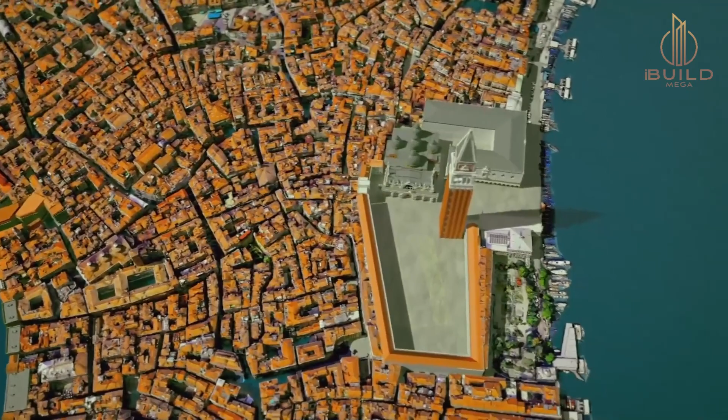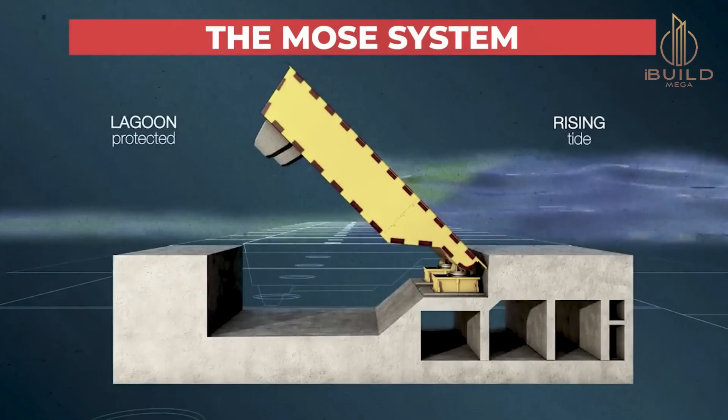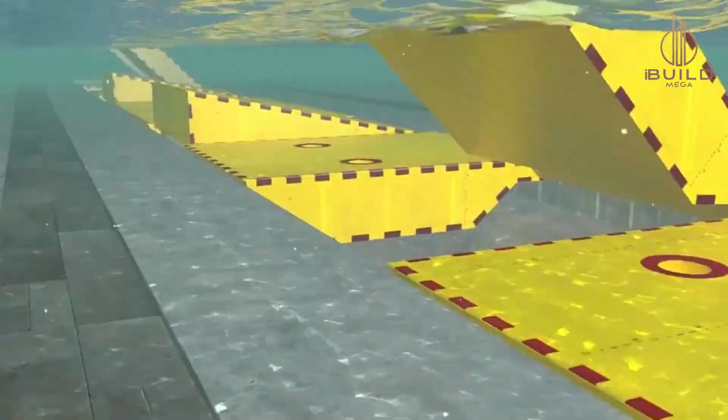In the face of adversity, the city is poised to make history once again, on this occasion via an audacious megaproject. Introducing the MoSE, a visionary defense system forged with a hefty $7 billion investment. This monumental project merges cutting-edge technology with centuries-old craftsmanship, a testament to Venetian ingenuity. The historic arsenal, once the heartbeat of Venice's maritime power, now pulsates with renewed vigor. Here, skilled hands and state-of-the-art machinery fashion colossal barriers, each piece meticulously designed to withstand the relentless Adriatic waves.

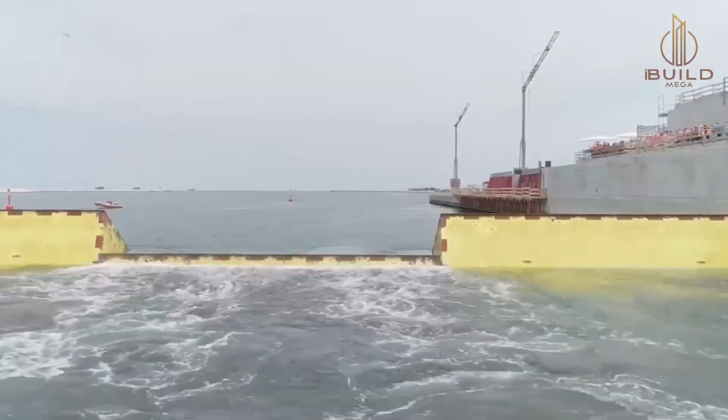However, this project is not without its controversy. It has been decades in the making, has required considerably more funding than originally forecasted, and been marred by corruption and environmental protestations, with aspersions also cast over its long-term sustainability. So what is the MoSE? How is it going to help Venice adapt to an ever-changing climate, and can other similarly threatened coastal cities learn anything from its implementation?

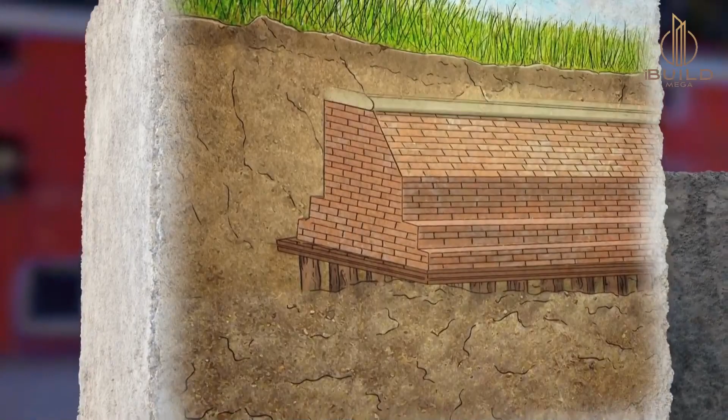Beyond the inconvenience and economic strain caused by the flooding, the city's remarkable architectural and artistic heritage is also under grave threat. Historic structures adorned with priceless artworks suffer from saltwater erosion, and foundations of ancient buildings are gradually weakened, putting their long-term survival in jeopardy. Preservationists work tirelessly to restore these treasures, but without a comprehensive solution, Venice's rich cultural legacy remains in peril.

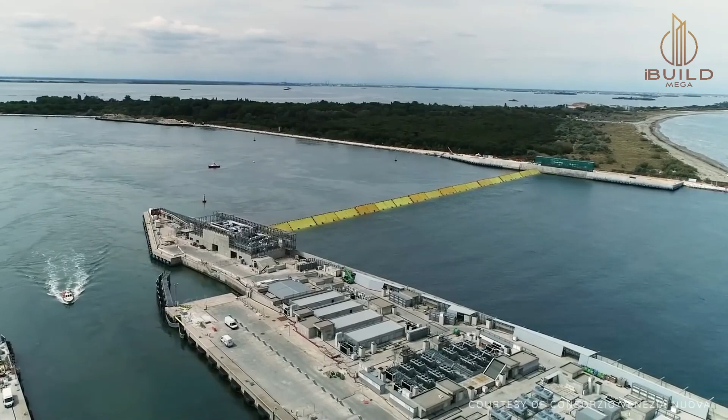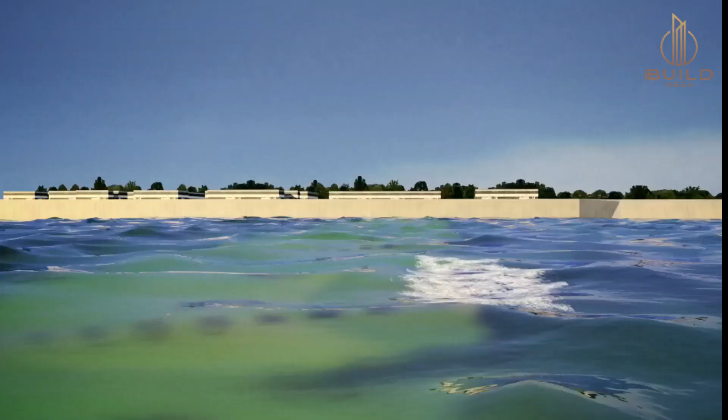This is where MoSE comes in, Italian for Moses and short for Modulo Sperimentale Elettromeccanico, or Experimental Electromechanical Module, a $7 billion flood blockade system finally up and running 18 years after construction began. The system consists of 78 gates, each 20 to 30 meters long and 20 meters wide, which rise up from the water when there's a threat of flooding.

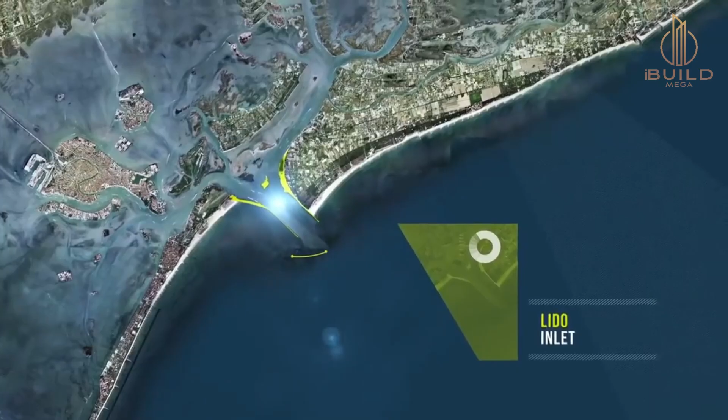These gates are distributed in 4 lines at the 3 entry points to the Venetian lagoon from the Adriatic Sea. The 2 southern inlets, Malamocco and Chioggia, have 1 barrier each, but further north in Lido lies the Treporti Inlet, the widest channel by far, with a seabed that varies in depth from 6 meters to 12 meters. Rather than building a massive barrier of varying height, an artificial island has been constructed to divide the inlet in half so that 2 smaller barriers could be built.

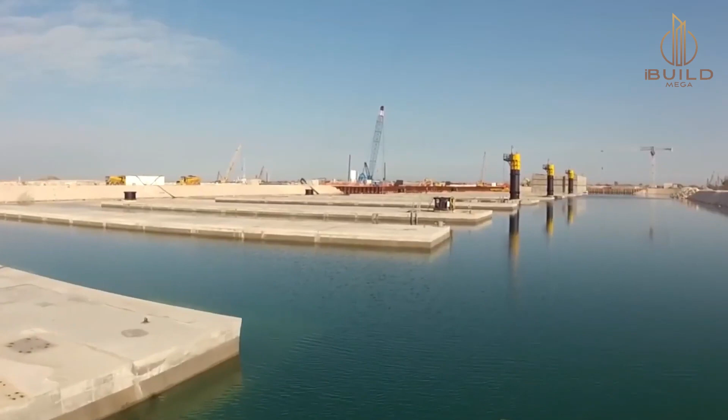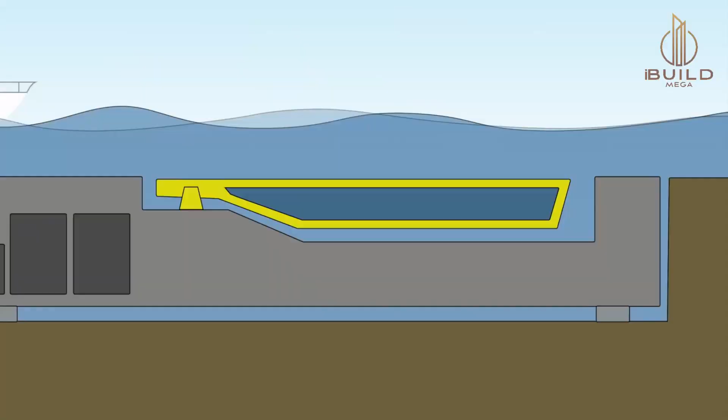And yet, when the barriers are not in use, you don't see a thing. Unlike flood barriers in Northern Europe at a much greater expense, the MoSE was designed to be invisible when the barriers are not needed. The gates are filled with water, submerged, and sit in massive reinforced concrete housing, allowing boats to sail by unimpeded. To raise the barriers, compressed air is pushed into the gates, forcing the water out, causing them to turn on their enormous 42-ton hinges and emerge from the lagoon.

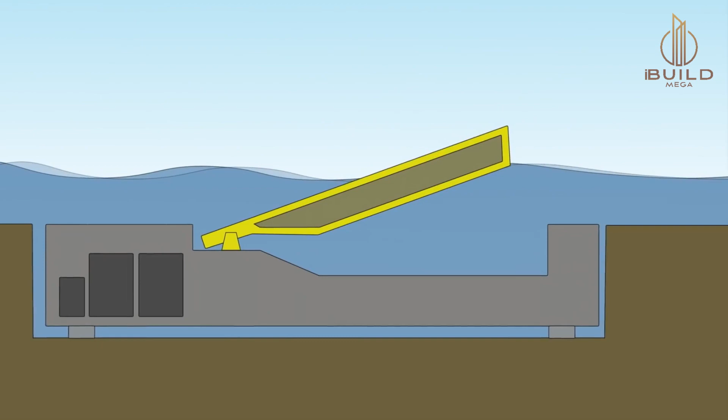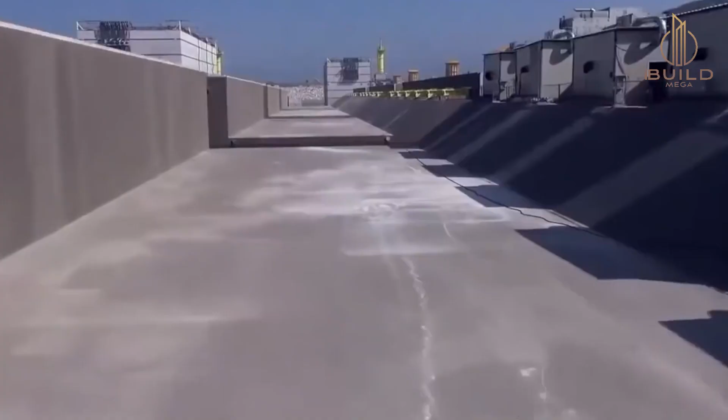Once raised, the barriers are elevated enough to resist even the most tumultuous of conditions. They can hold back tides as high as 3 meters and are designed with climate change in mind, with up to 60 centimeters of rising sea levels accounted for. Once the tides subside, the gates are filled with water again and lowered back into the concrete housing. Raising them takes about 30 minutes and the lowering process about 15 minutes. After decades of initial controversy, the building of the MoSE began in 2003, with the last fin installed in June 2019 on the Lido side of Treporti Island.

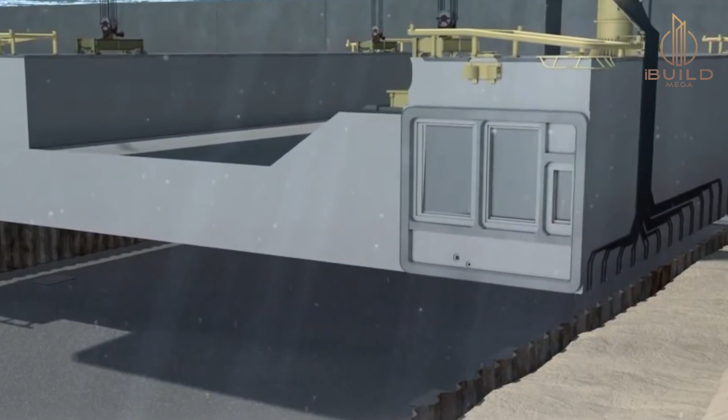The Venice lagoon is notoriously shallow. The depth averages out at just 1 meter. However, the inlets from the Adriatic are much deeper. Malamocco, the entrance to the industrial port, is 14 meters deep, for example.

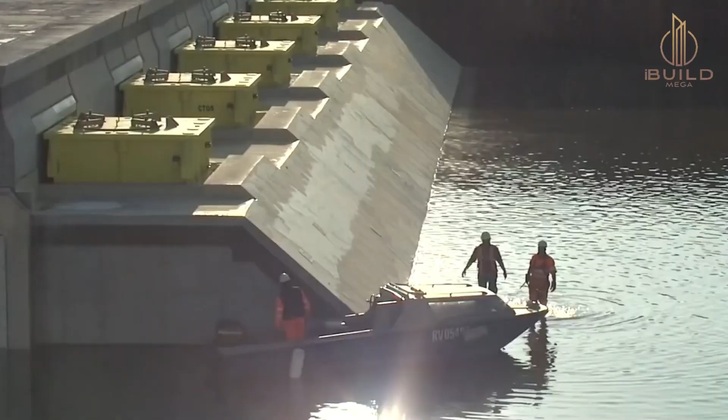Although they didn't alter the depths of the inlets, engineers excavated the seabed along all three to make room for the concrete cases, which fit flush alongside the seabed. The 14,000-ton cases were cast in concrete on the mainland, then floated into position and sunk beneath the water, while the debris removed from the seabed was used to build the island of Treporti, which houses the central hub and headquarters of MoSE.

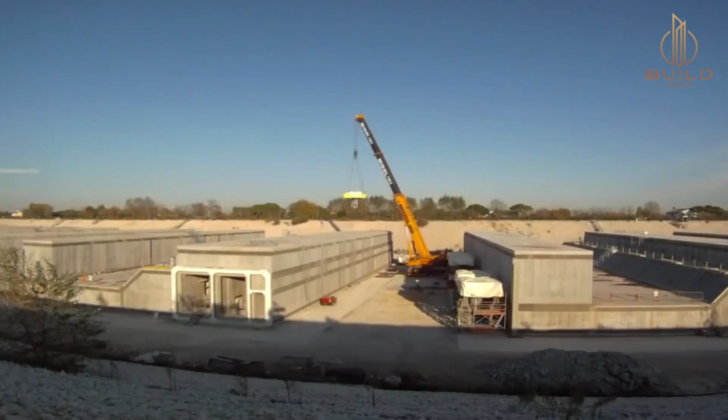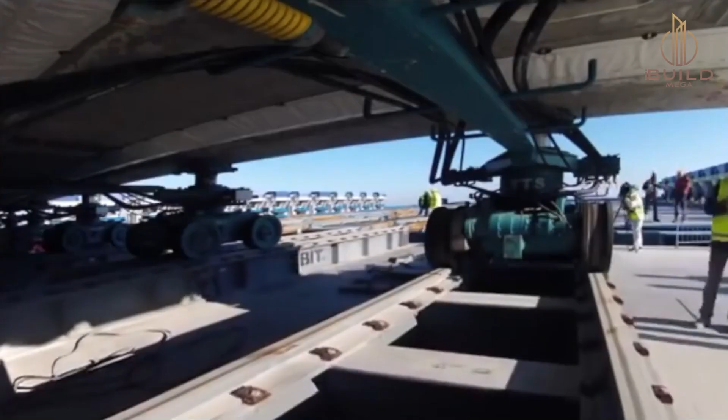The concrete used for the housings was a specifically formulated mix designed for durability, strength and resistance to the corrosive effects of seawater. The housings were constructed using reinforced concrete, which involves embedding steel reinforcement bars within the concrete to enhance its tensile strength and structural integrity.

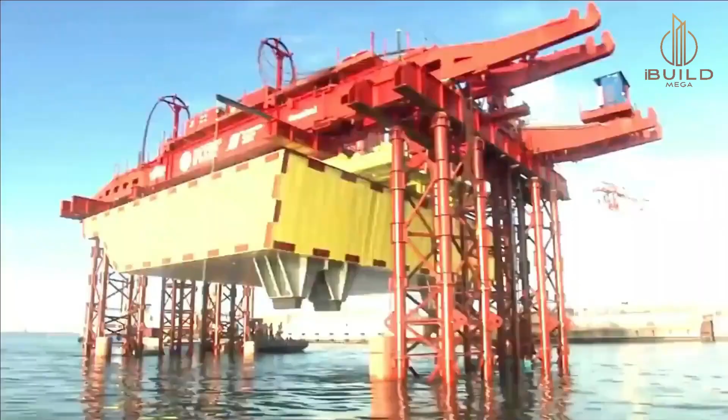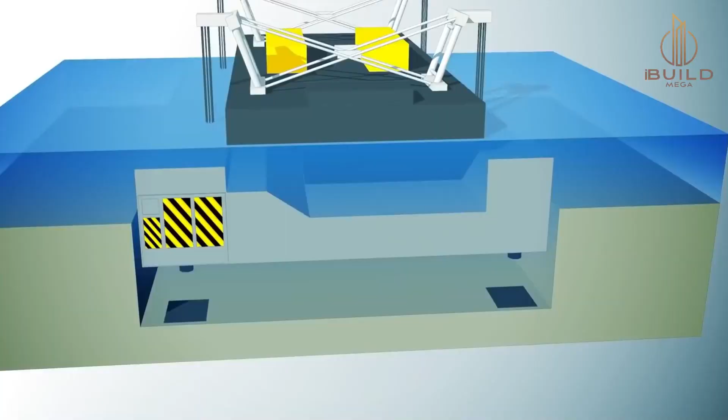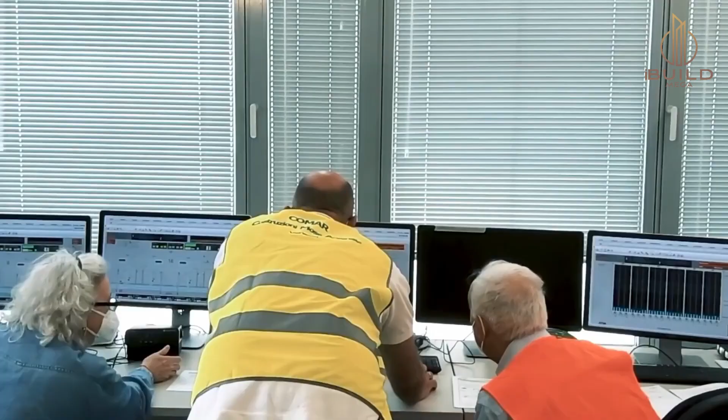Specialized heavy lifting equipment and cranes were used to carefully transport and position the sections in place, with hydraulic dampers laid on the seabed allowing the housing to be safely lowered. The construction of the housing followed a carefully orchestrated sequence. This involved building temporary cofferdams around each housing site, dewatering the area, and then proceeding with construction in a controlled, dry environment.

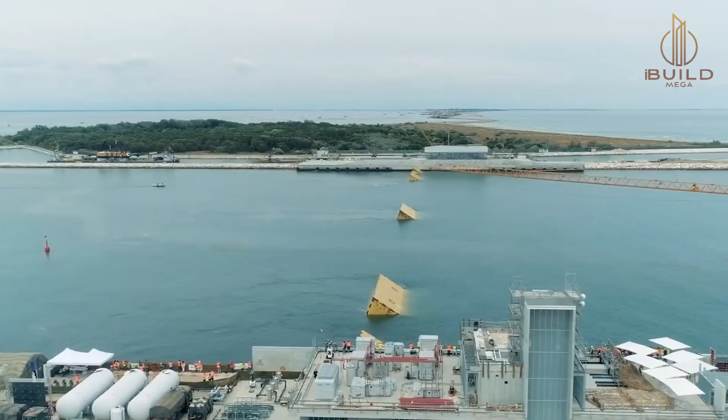Inside the concrete chests sit the metal floodgates, treated every 3 months with a non-toxic anti-corrosive to preserve the lagoon's ecosystem. Each of the 78 barriers is a uniform 20 meters wide and varies from 20 to 30 meters in length, depending on the depth of the water.

Of course, projects of this size are rarely without their detractors. One of the main criticisms leveled at the MoSE is that the barriers interfere with the lagoon ecosystem, turning it into a pond cordoned off from the natural flow of water rather than a living lagoon.

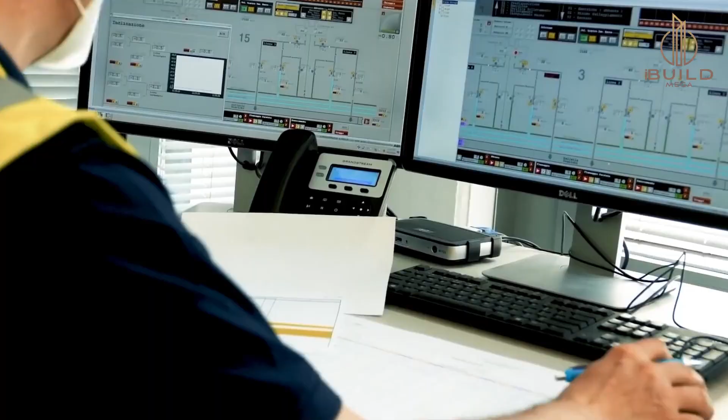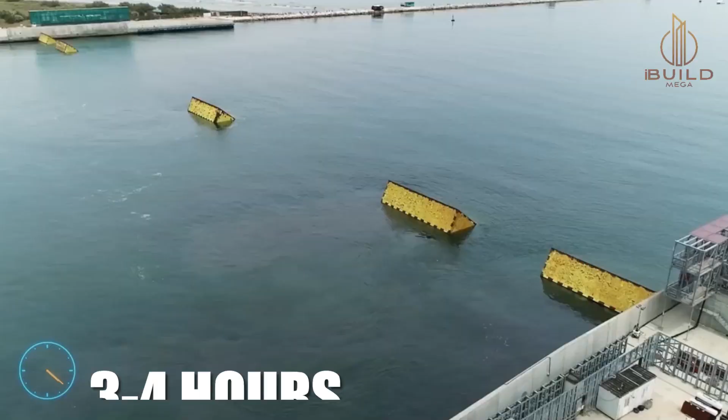According to Elisabetta Spitz, the commissioner responsible for the project who reports to the Italian government, the barriers were once up for 48 hours simply to test their resistance, and in the future, even in periods where the barriers need to be up daily, they will only be up for around 3 to 4 hours at a time. They've also installed locks at Chioggia and Malamocco to enable some fishing vessels and industrial ships to pass while the barriers are up.

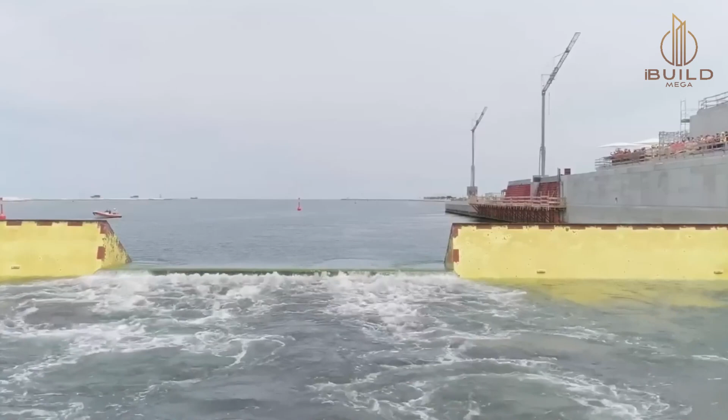Another criticism is the exorbitant overheads. The MoSE cost around $8 billion to build, and accounts from its first year suggest that it cost $328,000 to raise it every time, nearly double the original estimates.

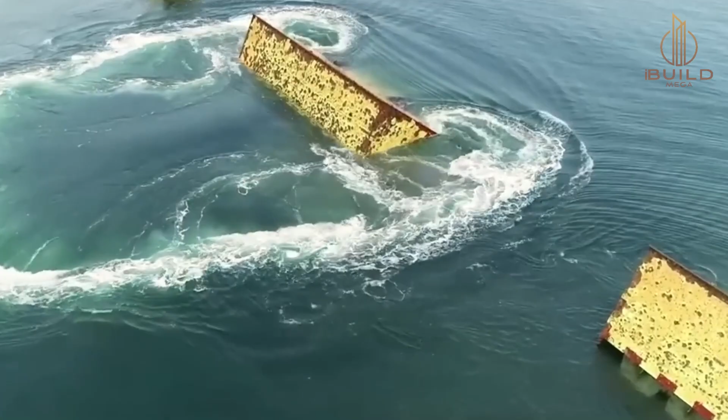The fins must be treated with anti-corrosive every 3 months, and their containers must be dredged twice per season, after a buildup of sand inside them meant that 6 fins could not be lowered during 2020 trials. The containers will need a thorough clean every 5 years. Despite these aspersions, there is evidence that MoSE is working effectively.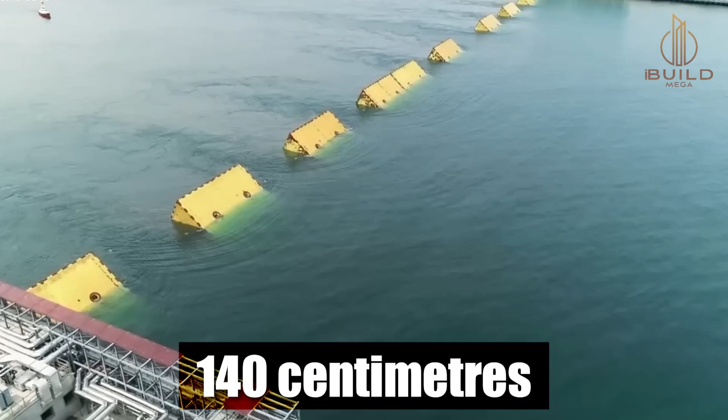In November 2021, forecasters warned that water levels might rise 140 centimeters above normal when high tide peaked and strong Sirocco winds battered the Venetian coast. Water at that level is enough to flood 60% of the city, including the iconic St. Mark's Square, the lowest part of the city.

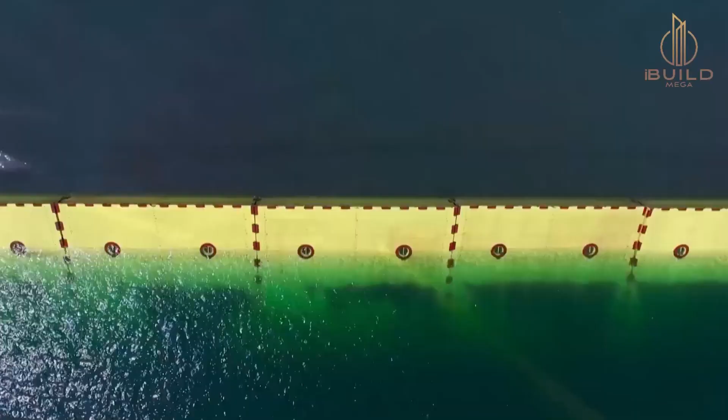Activating the floodgates proved successful in this case. While high tide water levels rose above 130 centimeters in the Adriatic Sea, they reached just 83 centimeters in Venice, enough to prevent major flooding. MoSE has been used several times in recent years as engineers test it and work towards making it fully operational. The floodgates were activated 5 times in 2021 and 20 times in the previous winter.

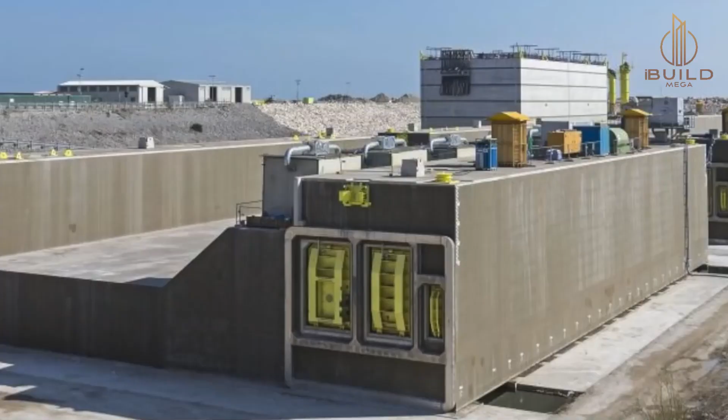Though MoSE has prevented several high tide floods, sometimes high water has eluded system operators due to inaccurate weather and water height forecasts. For instance, much of Venice flooded in December 2020 after forecasts underestimated the maximum height of a high tide by 5 centimeters, enough to prevent operations from elevating the barriers in time.

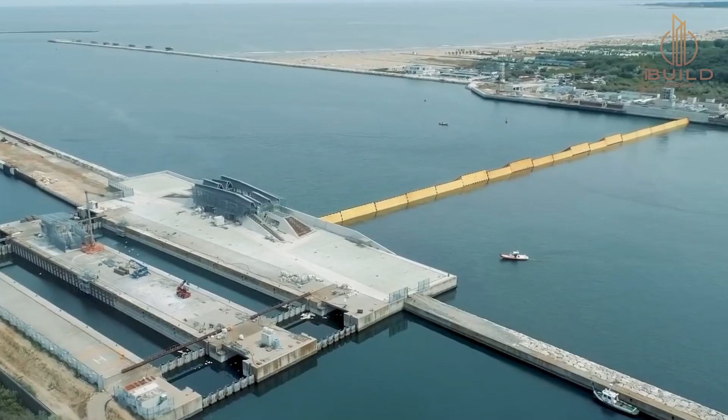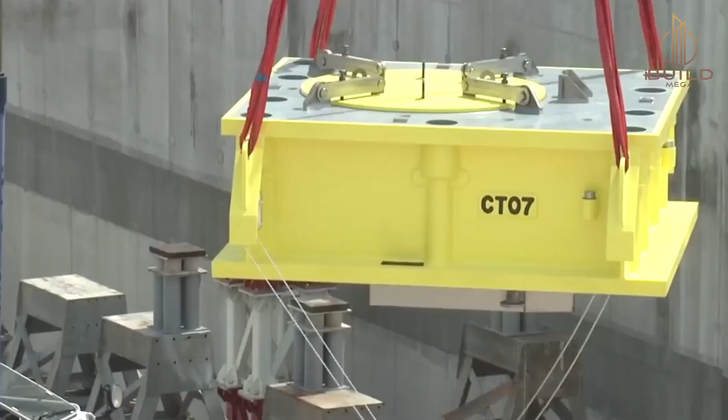As the MoSE system fortifies Venice against the rising tides, a question lingers: will it stand the test of time? Its concrete might and clever engineering demand respect, but the evolving forces of nature remain unpredictable. Its success sparks hope, yet challenges persist. Can other coastal cities draw inspiration from this advancement? Or are more traditional systems, such as the Thames Barrier, still the benchmark for flood defense?

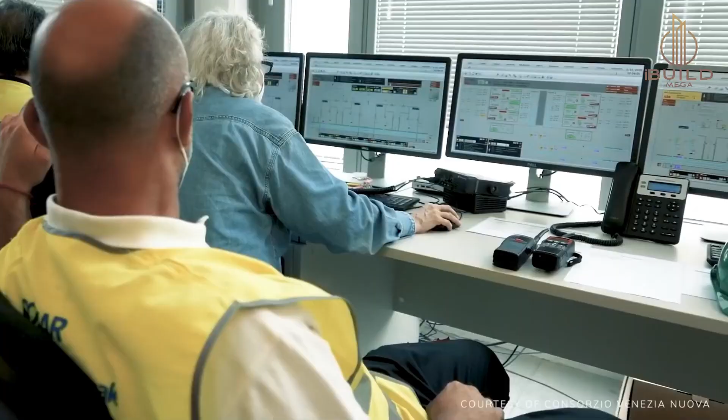The MoSE project teaches that proactive measures are paramount, but each locale demands a bespoke approach. Whether the doubters are proven right eventually or not, the people of Venice are putting their trust into the new flood defense system. And in the immediate present tense, that should be all that matters for now.